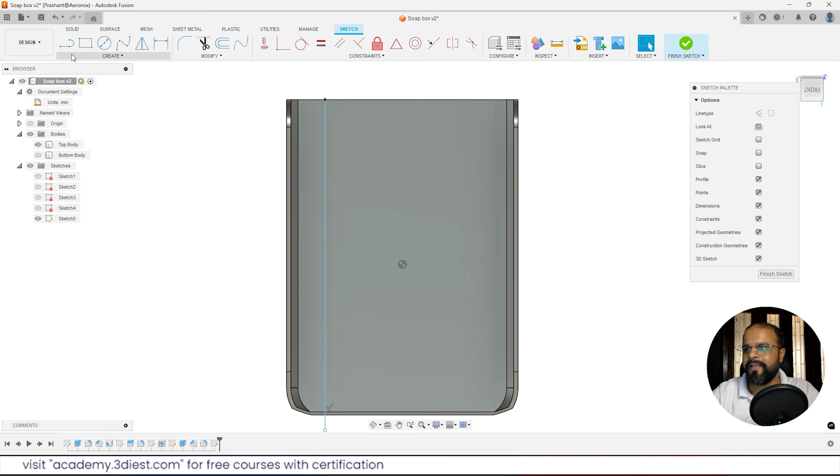So to start working on the top body, first we'll turn on the top body. Here you can see. Now I will turn off the bottom body, and here is my top body.

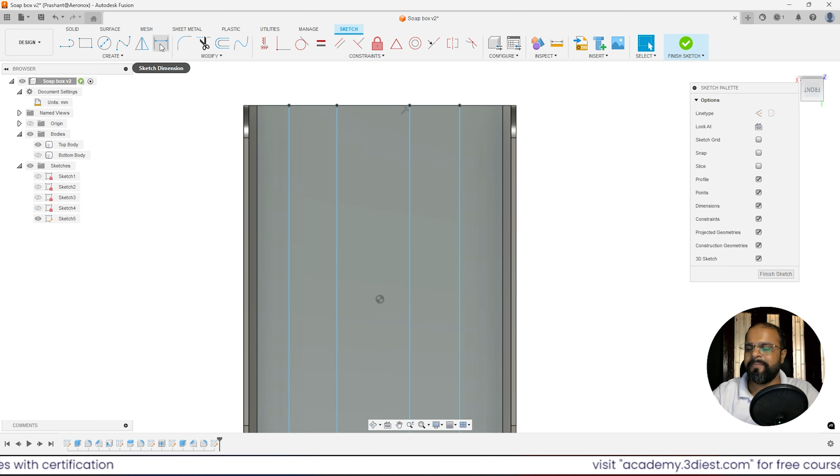So in the top body also we want to add ribs to give some strength to this face. So again I will click on create sketch and select this face as the sketch face from the top body. We'll click on it. Here you can see it is active right now.

Again I will start creating the line. I will go on to the create panel and activate this line tool, and here I will create the first line, and then activate the line tool again for the second line. So each time when I am done with creating one of the lines, I had to press escape on my keyboard, and then reactivate the line tool to start creating the next line. Here you can see, like this.

Now I will activate my sketch dimension tool. I will make sure that from this side to this edge I am keeping 16, and from this line to this line again I am keeping 16. We'll do the same on the other side. From outer edge to this line I had to keep 16, and again from this line to this line I had to keep 16. So I had created only 4 profiles onto this top body.

But here I will select all these 4 end points of this line and apply this horizontal constraint. Now I will click on these points and make sure it is snapping onto this edge, so I will just place these points onto this edge. Now I am done with the profile.

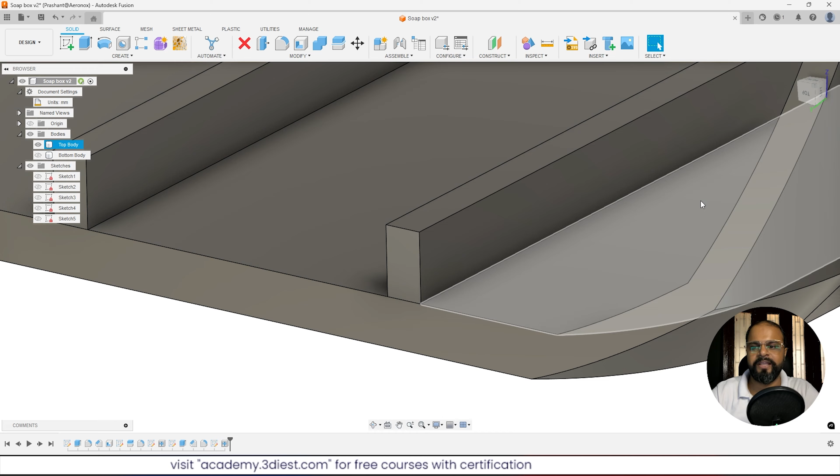So here you can see we just added these ribs onto this body, but on this side it is completely fine, while on the other side these ribs are going outside from this body, because when we used the web tool we made a small mistake. That mistake we can identify if I go back to my design timeline at the bottom of Fusion 360. The last tool that we performed, I'll right click on it and click on edit feature.

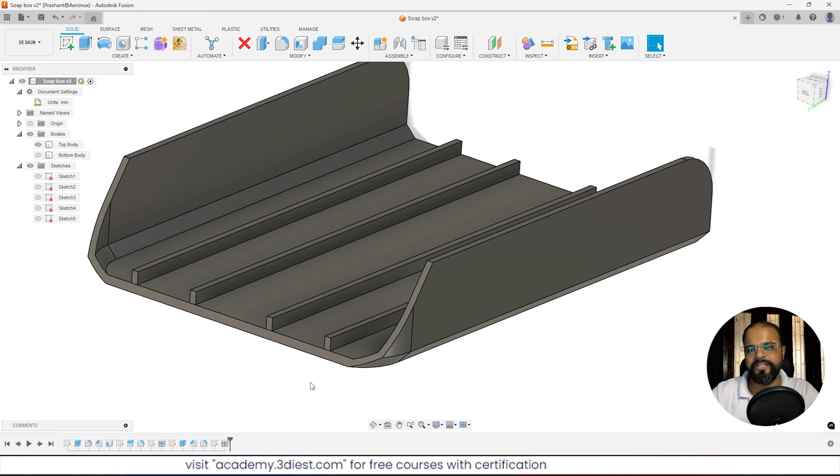Here you can see under this web tool we had turned on this option that says extend curves. So if we zoom onto this area, here you can see, and if I turn off this option, you can see it is not extending the curve. So this is what we needed. Now if we press OK, you can see now they are completely fine, just finishing at that particular edge, and on the other side they are completely fine.

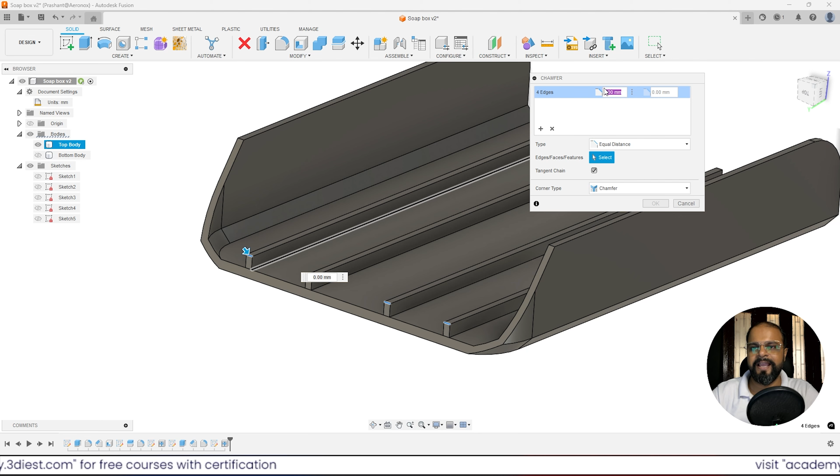So this is how, using the design timeline, you can correct your 3D models or designs very easily without wasting any time. You don't have to worry about finding all those features. You just simply come onto the design timeline, identify the feature that you used to create a particular thing in your design, and you can change it accordingly as per your need.

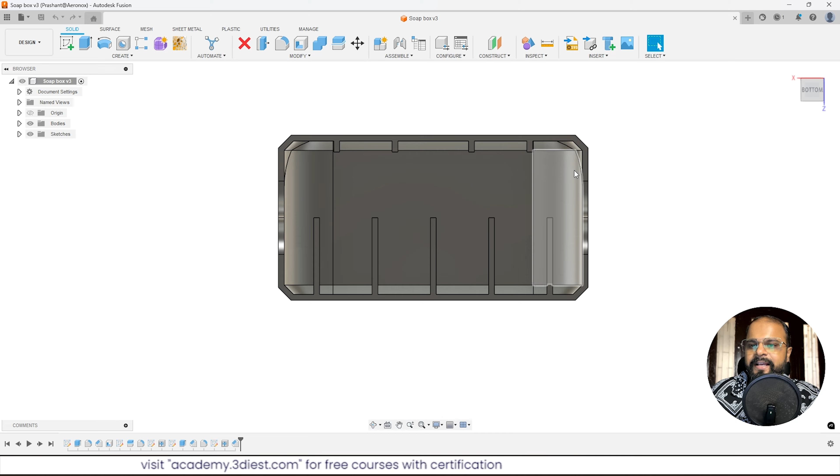Now here's a small thing we'll add: activate the chamfer tool from the modification panel and chamfer these corners. We'll apply a chamfer of 3 millimeter on all these 4 corners. I will make sure it is equal distance chamfer this time, and apply a value of 3, and here you can see they are getting chamfered by 3 mm. I will press OK. So here is my result onto the top body.

So if I turn on the bottom body also, you can see from the bottom view, here are my ribs on the top face and here are my ribs on the bottom face, and I made sure these ribs are not in front of each other. You can see this rib is coming between these 2 ribs, whereas this rib is coming between these 2 ribs. There is also a reason for it.

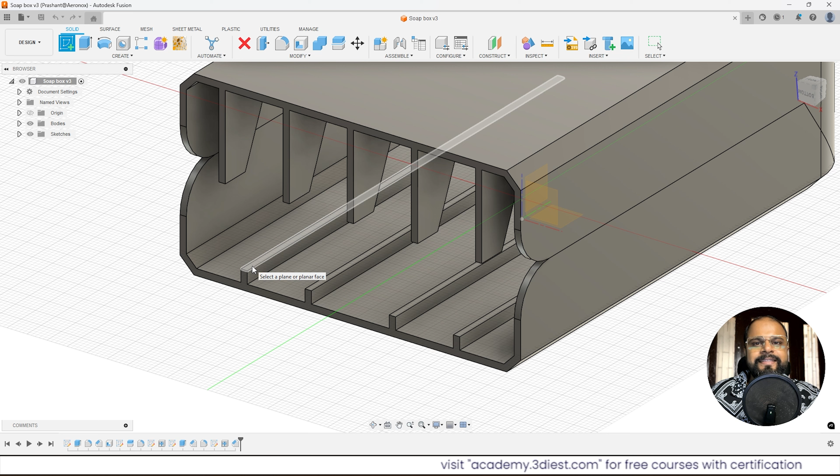I did it like this so that when we try to assemble these two pieces, as you can see on the bottom ribs, we had added these extra heights. And if you'll see this model from the bottom view, you can notice that this area is still open, so whenever the box is in closed position, the soap can fall from this area. So to cover this area, we will add a similar height, extending these ribs like we did for the bottom piece.

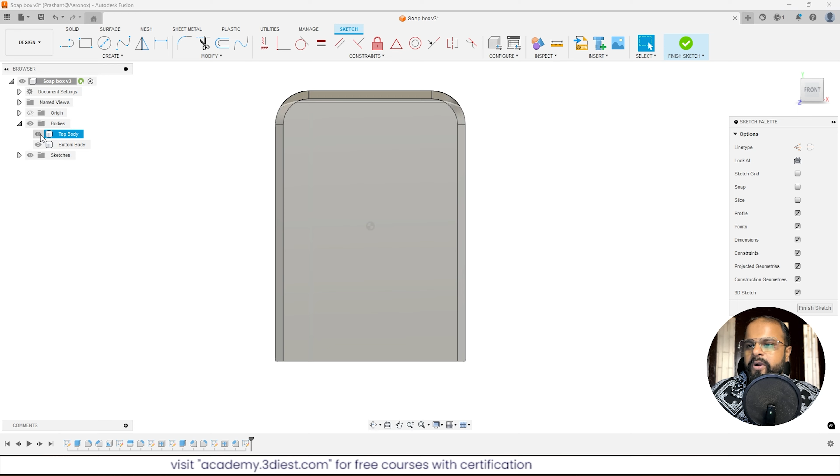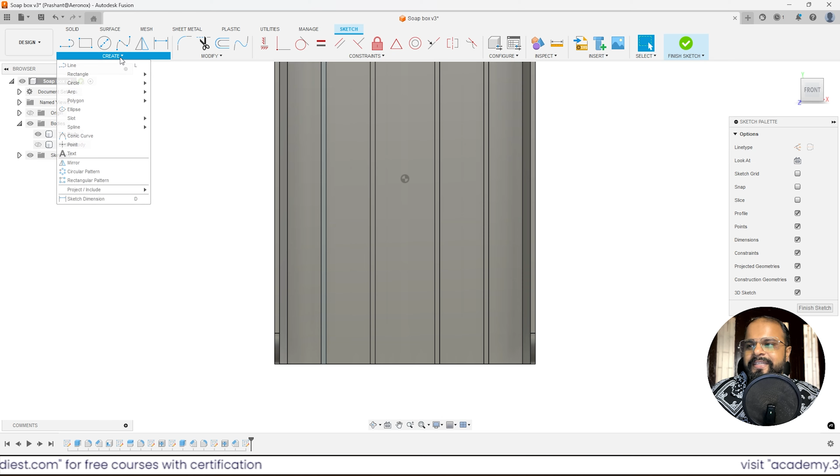So for that, we'll rotate our object like this using our orbit tool. As you can see, I am pressing middle mouse button and shift simultaneously, so I can orbit my object since my orbit is active. Now I will activate the create sketch tool and click on the top face of this small 3 mm ridge that we had created.

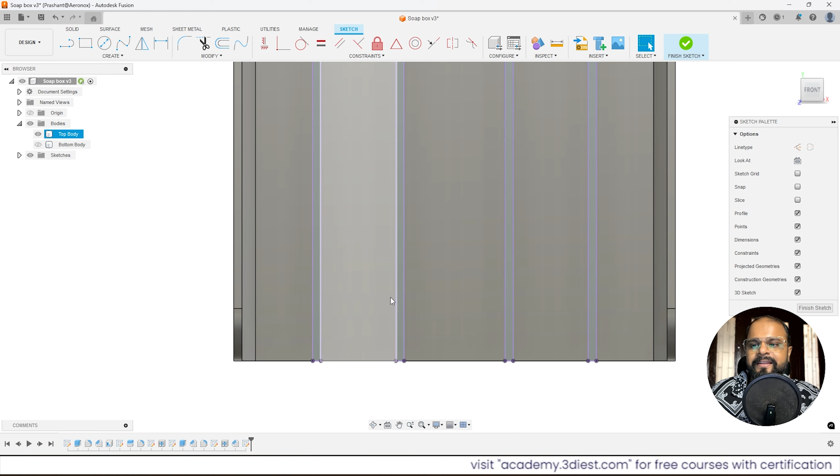So I will activate this create a sketch tool from this create panel under the solid tab, and then I will click on this top face as a sketch face. Now you can see we just got sketch tools active. Also we are in 3D view right now. So since we don't need the bottom body, we'll turn it off, and we are going to create the sketch on the top body.

So what we'll do, to make a same line, we had created a line over here. If you remember, in the bottom body we created a separation line over here, and because of that we got these areas separated, right?

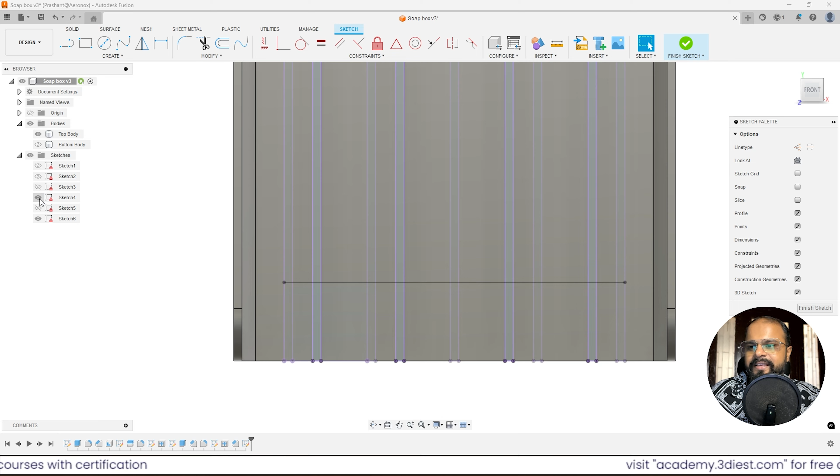So before that, we'll go onto this create tab, go onto this project tool, activate it, and select these faces. So we get all the curves and lines projected onto this plane. I had selected all these four faces, and now if I press OK, you can see all these lines that are purple in color just got projected.

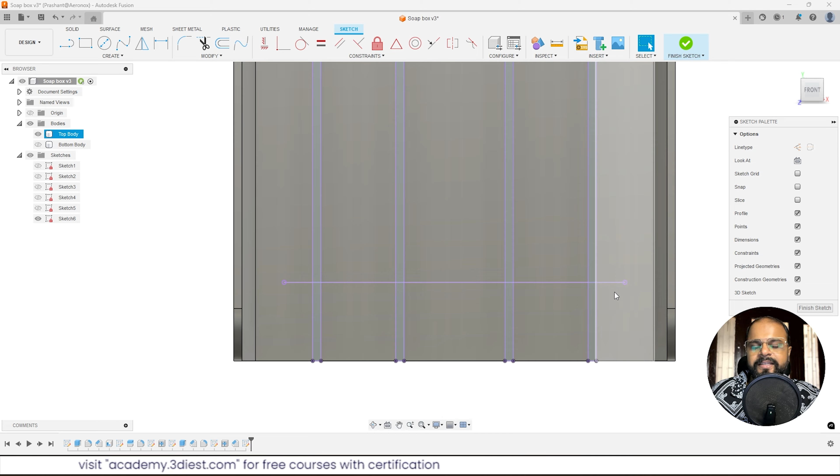Now I will expand my sketch folder and find the older sketch that we used for the bottom body. This sketch 4, I think, is that sketch. If I'll just hover my cursor onto the sketch, I can see the highlights. So sketch 5 is not the right sketch, sketch 4 is the right sketch. So I will turn on that sketch. Here you can see, I can see that separation line.

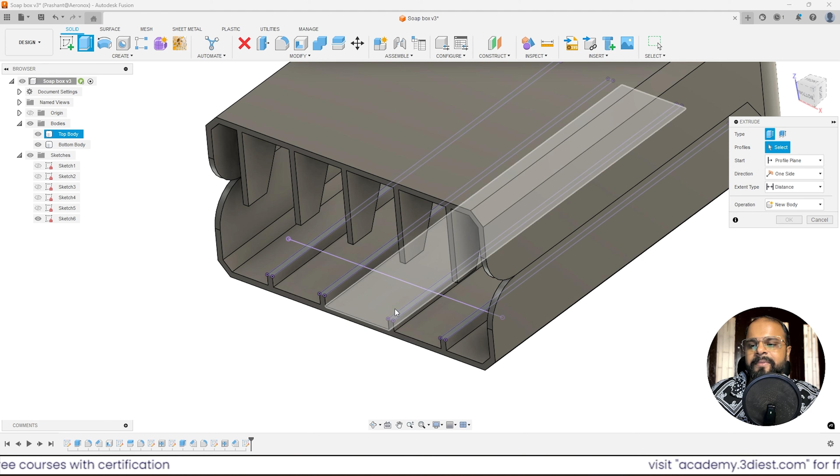So what I will do now, to project this line onto the current sketch, that is sketch 6, we'll go onto the create panel again, go onto this project tool and activate it. Then we'll click on this line, so this line will be projected inside sketch 6. And now if I press OK, that line just got projected. So if I turn off sketch 4 now, you can see that line just got projected. Now if I orbit it a little bit like this, there you can see, so we got that thing right.

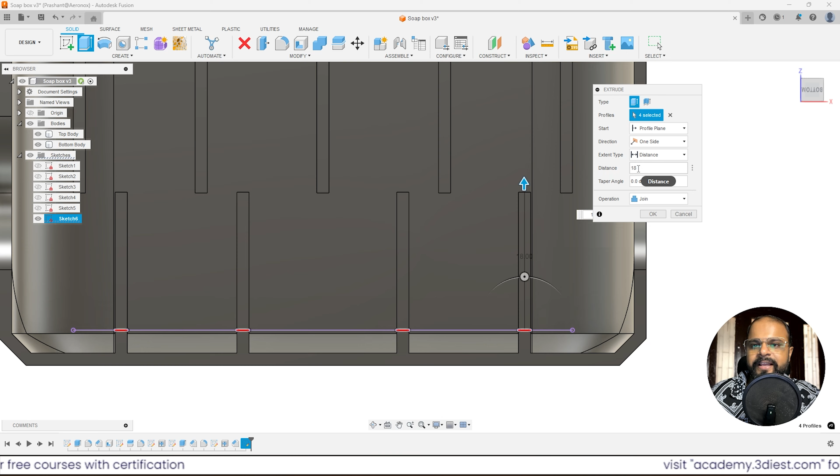Now if I will turn on my bottom body, I can see the things very clearly. I will finish the sketch, and then again I will move back to the solid tab. Under the create panel, I will activate the same extrude tool to give this profile some height.

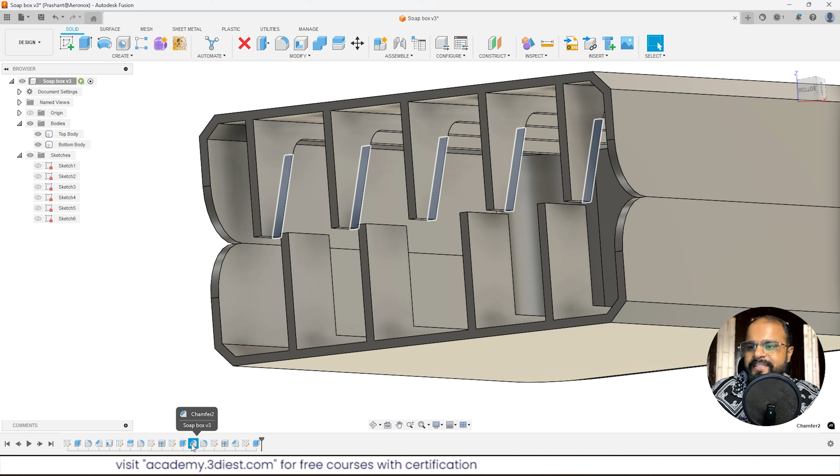So here you can see under the profile tab, I had to select my profiles first. So I will select all these small profiles that we had created, and by using this arrow, we can extend it up to the height of this point. So to extend up to that height, we'll go to the bottom view from the ViewCube so I can see it clearly, and then we can extend it like this up to that particular height.

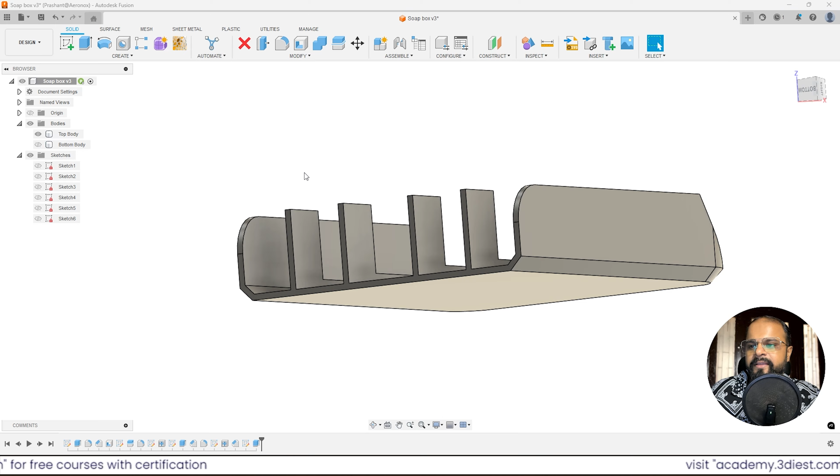So that distance, I believe, is 18 millimeter. Here you can see from the distance tab I had entered the value 18 from my keyboard, and the operation will be joined because we want this extension to be joined with the top body, right? So I will press OK. Here you can see this is the result we got.

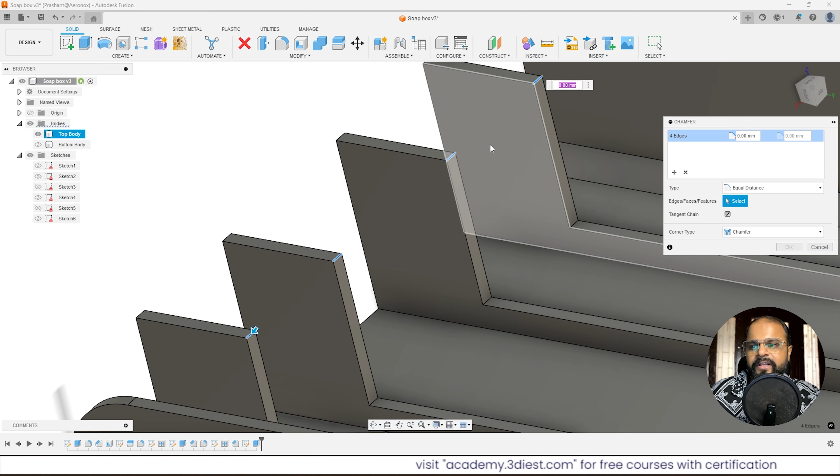And again the same thing, we had to apply these chamfers that we had applied before. But we don't remember the values, so don't worry. What we can do is go onto our design history timeline and identify that chamfer. So this is the chamfer that we did, right? If we make a right click on it and click on edit feature, here you can see we had used two distance chamfer on that particular area, and the distance was 8 millimeter and 17.9 millimeter.

So I will cancel this one because we want to create chamfer on these edges. First I will turn off my bottom body, then orbit it a little bit so I can see all these internal edges. I will activate my chamfer tool from the solid tab, from this modify panel.

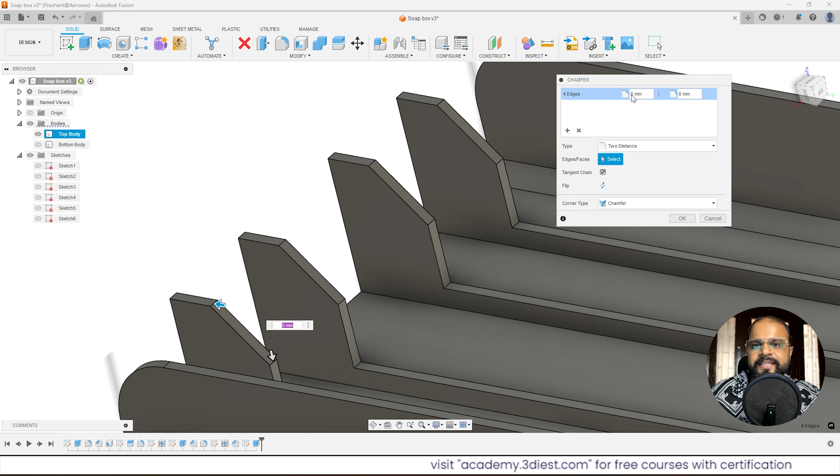Then I will select all the edges very carefully one by one. Here you can see I don't need to press any key, I just need to keep selecting the edges that I want to select very carefully. And somehow if you had selected some edge accidentally that you don't want to select, you can press the shift key on your keyboard and click on that edge again, and that will get deselected. Here you can see I had selected the four edges only, and that we can verify under this box, four edges.

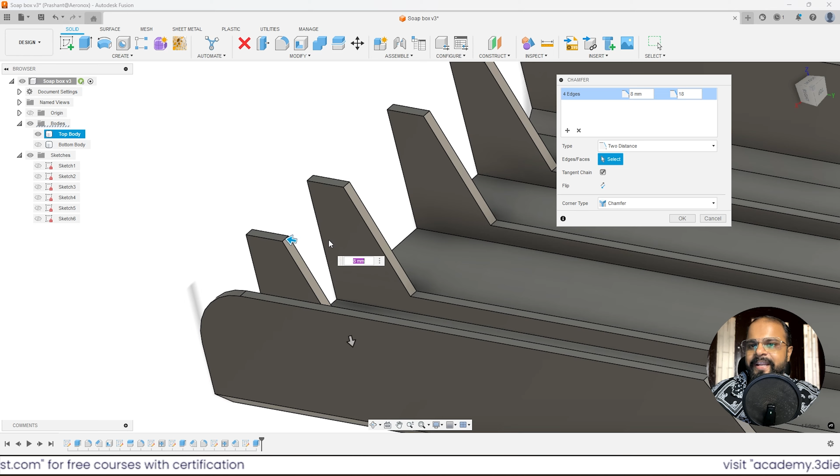And here the values that we had to assign is 8 by 17.9, but because equal distance chamfer is active, both the distances are the same. So I will change this to two distance chamfer.

Here you can see now on this side I had specified 8 millimeter, whereas on the vertical side I will just specify maybe 17.9, or maybe a little bit higher. So I will change this to 18. Yes, 18 is the exact distance.

You can see it is getting chamfered up to this face, right? Flat face. So that is completely right. Now I will just press OK to accept this result. And here you can see this is what we got. So we got the top body and the bottom body, and these ridges, these ribs that we extended from both the pieces, are there just because whenever the soap is inside and if it is in closed position, it will not fall down.